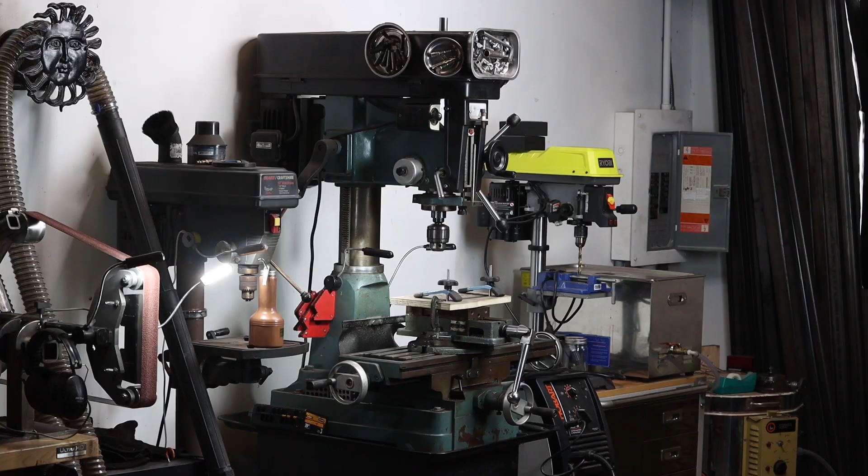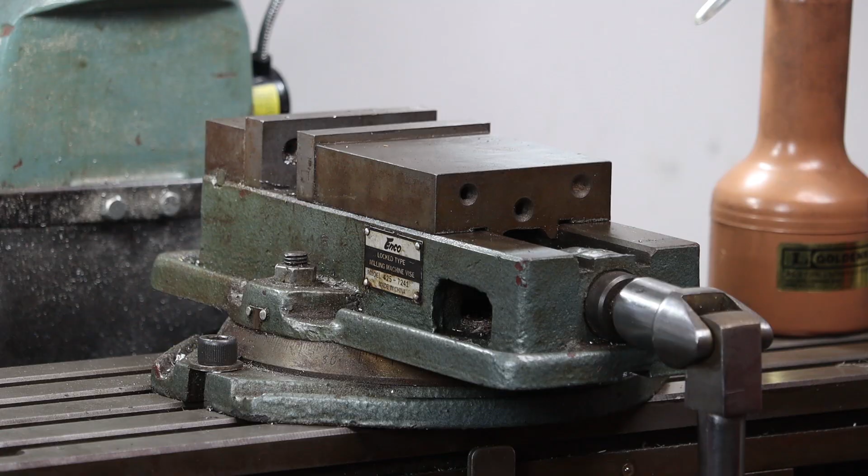So, as you know, I've got this really super cool Enco 105-1110 milling and drilling machine, and I use it every day. There's something about my workflow with it that I use it more like a drill press than a mill. However, the way it's set up, it's more set up for a mill. It's got a vise that sits on the work table, but you have to kind of go back and forth if you want to be able to utilize it in both capacities.

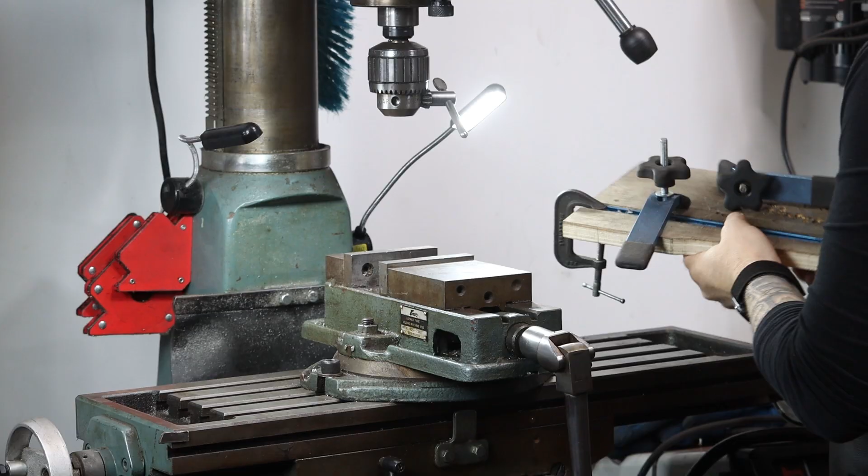Now, I came up with a wooden work rest that sits down in the vise, and it's got some cool little clamp downs and other things in there that make it pretty simple to hold your stuff down, but it actually is chintzy. It's made out of wood, it flexes as you use it. It's just not ideal, right?

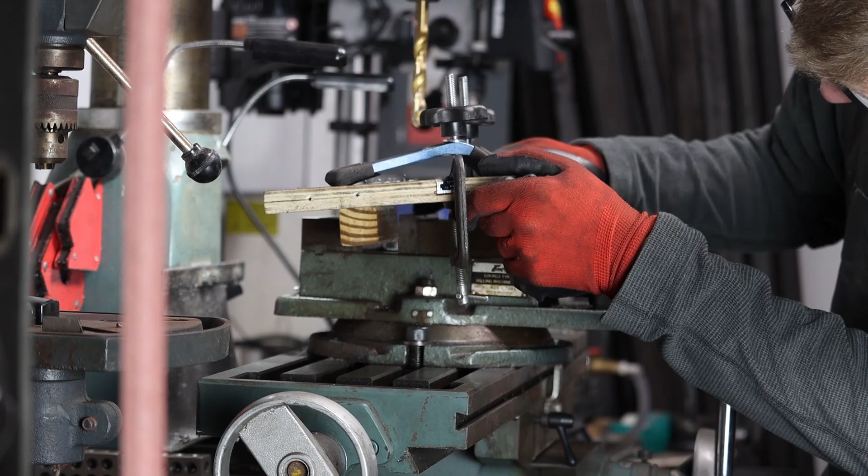So I've been threatening to do this for a while. I want to build that thing out of steel so it can slide into that work vise just like the wood one will. However, it won't have the flex. We'll drill some holes in it, we'll tap those holes so that we can use those as hold downs. And I want to mill some grooves in it so I can put those clamp downs back on there.

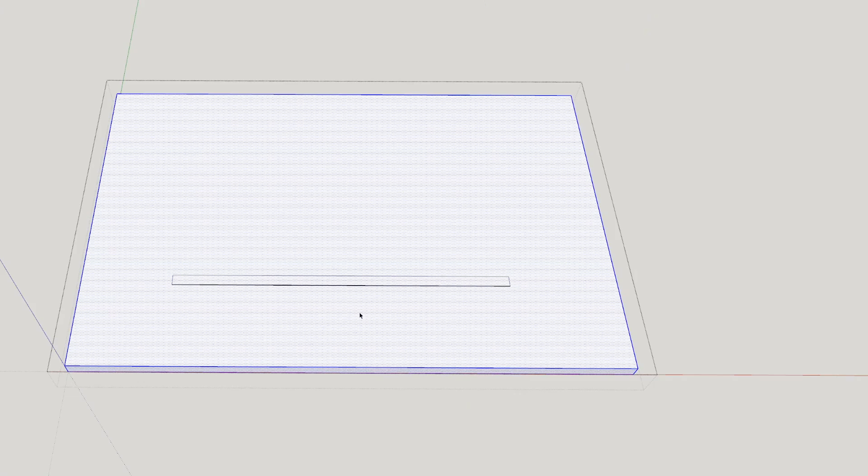So I sat down and sketched it up over the weekend. I drew it all up. I think I've come up with a pretty decent design for it. This is actually not that complicated of a project, so if you're thinking about getting into metal fabrication, this might be a good starting point.

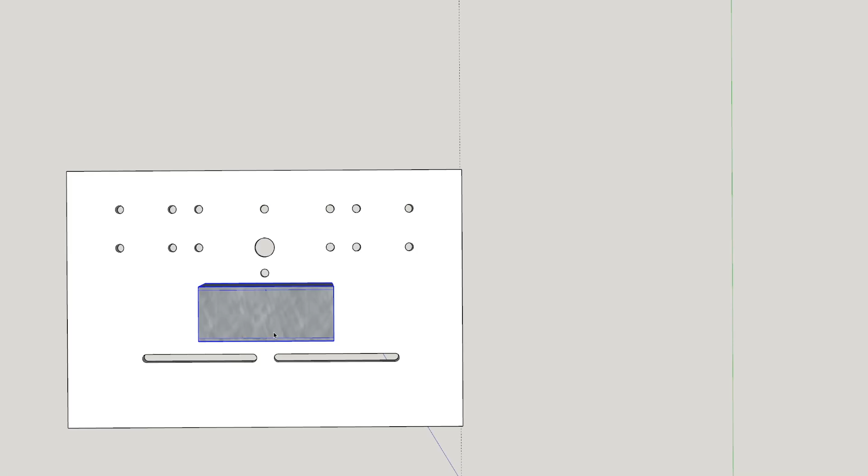We're using mild steel plate, we're using tube steel. You can cut all of those with an angle grinder and a cutoff wheel. We're going to be drilling some holes, tapping them, and basically doing some very minor math to figure out where we want certain things. But yeah, it's a very simple project.

However, it's a super important one, because every minute you're spending at your drill press, your mill, whatever you're working on, if you're swapping tooling out back and forth, you're just eating up time. And that's really the only thing we've got that is a finite resource: time. I'm hoping to bank some time by taking a little time today and building the proper tool to help me along with whatever I've got going on right here in the workshop.

So enough yammering on. Screw it, let's do it.

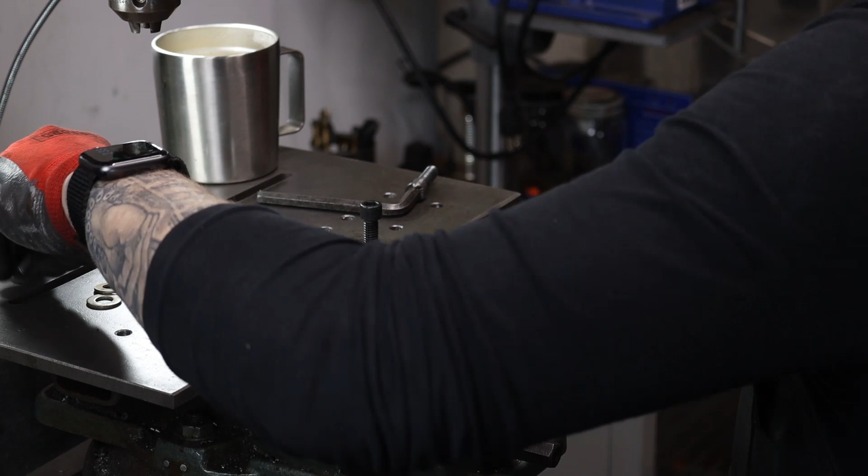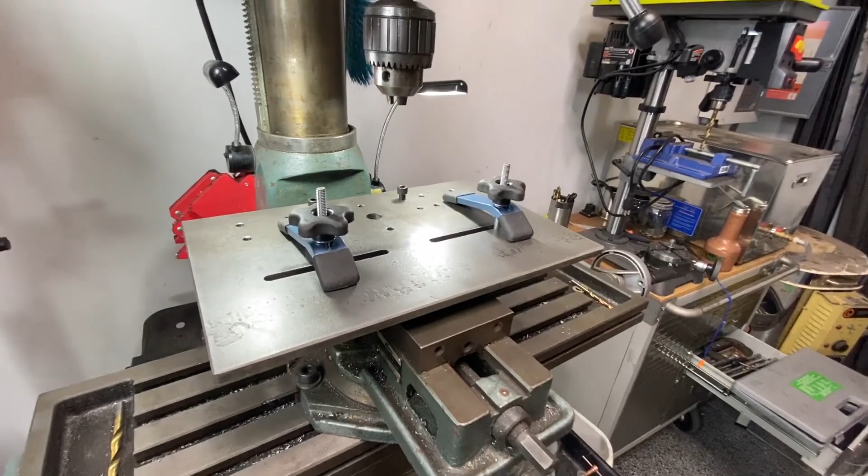Okay guys, so you can see we have built a super cool, very versatile little work resting table. One thing I really like about this is that you don't actually have to have a mill to utilize something like this. You could throw this in a vise, you could mount it to a table. There's all kinds of things. It has already proven to be super useful.

I'm working on another video where I'm building a platen for the 2x72 grinder, and I needed to drill a few holes. So I thought, hey, all right, it's here, let's give it a shot. And it actually sped up my process quite a bit.

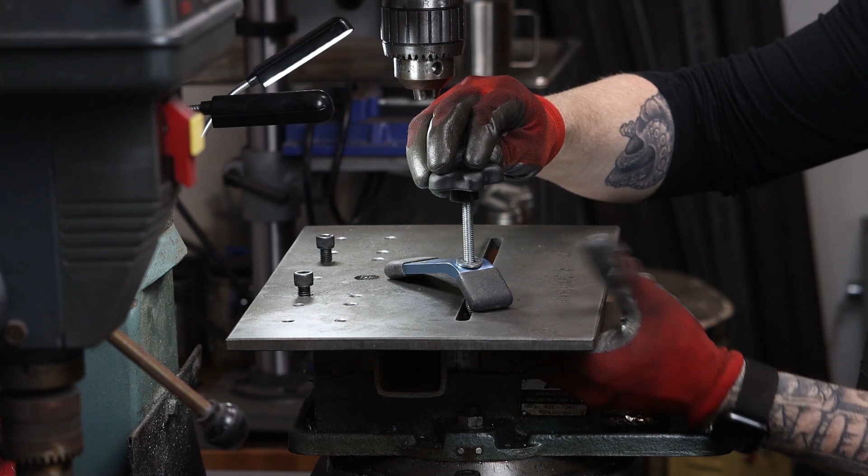Some of the cool features, as you saw, I put in these slots for these clamp downs. Already super, super cool, very easy to use. They slide around exactly the way I wanted them to.

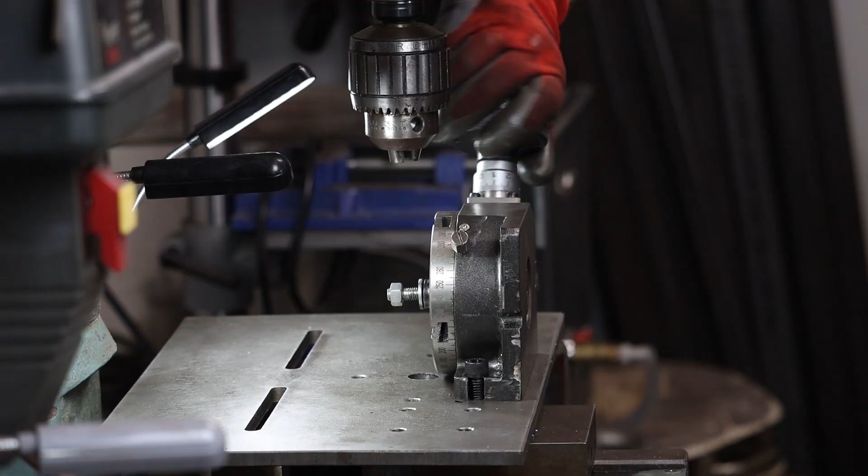These holes are 5/16 drilled, but they're tapped to 3/8 inch by 16 thread. So all of these will be tapped out. I don't have them all quite tapped out just yet.

And of course, at the last minute, I thought, hey, how cool would it be if I actually drilled some holes that would match all those cool little clamp down things that I've got for the actual work table. And they're a different size - they're actually a 1/2 inch 13 thread. So yeah, I'll probably end up adding more holes to it as I go.

That's kind of the cool thing of being able to do this stuff. It's like as it evolves into something you really, really want. You know, you have an idea in your head and you're like, hey, this is cool, let's make this happen. And then you use it a little bit and you realize, oh, I want to add this and I want to add that. That's the freedom of having tools like that. That's basically the reason why I do this. I feel so free when I'm working with these tools. I can do anything for the most part, I can build anything for the most part. And that's empowering to me.